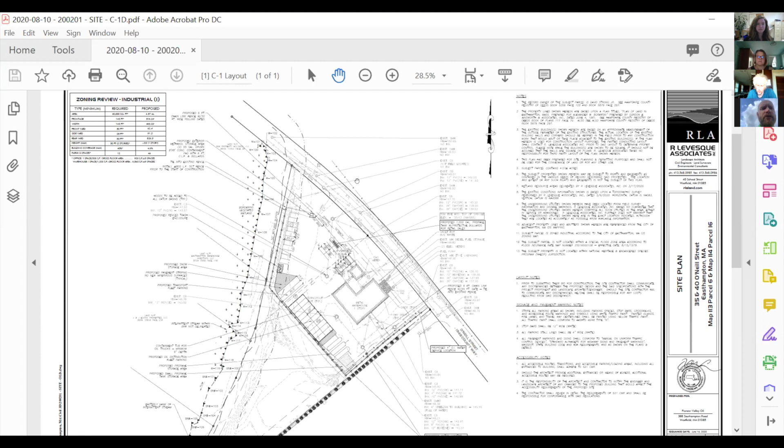The real change is that we relocated the oil truck storage area and the propane truck storage area. We left the propane tanks as is. Today at the site visit we discussed moving them to the top left, but we decided against that to keep the propane tanks in the safest location possible.

But we did have the ability to take the oil trucks. There's no transfer of oil on site, but we do have oil trucks, so the idea was to take the oil trucks and get them out of the buffer zone. The parking you see within the buffer zone, to the top left, those spaces are for the propane storage trucks. There's propane going out to different locations throughout Western Massachusetts from this facility, and that's where they would be stored.

If we can go to the letter—or are there any questions on the plan? There's really no major updates other than those.

Can everybody hear me okay? Questions on the plan?

All right, I think you can move on to the letter. Okay, thank you, and I apologize if it's a little crazy today because I'm literally stopped on the side of the road coming back from my site visit on this job. So it's a little crazy.

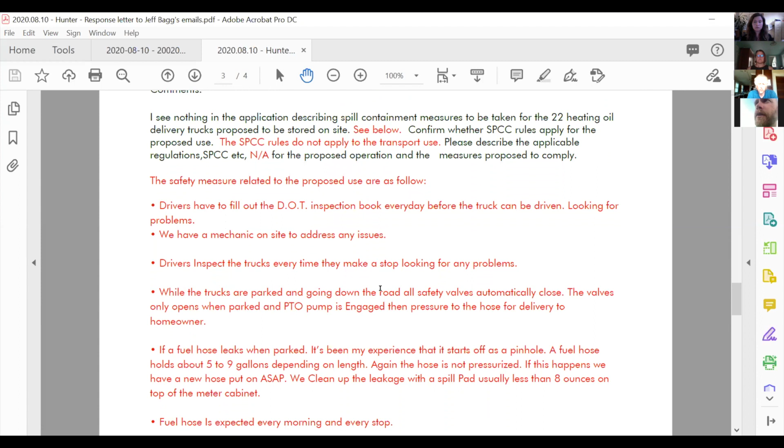So there were questions from Jeff Bagg, similar or related to the same. I've copied and pasted the response from Mr. Hunter regarding the inspections. I believe Mr. Hunter is on the call if he was able to log in and can speak to the details of MassDOT and their stringent requirements for maintaining vehicles and the ongoing maintenance and inspections. So with that, I would turn it back to the commission for any questions.

Commissioner Buttrick, do you feel that your comments have been addressed? Yeah, I think it clears things up quite a bit.

I guess maybe I misunderstood the intent of the site at the last meeting, that there's no transfer of fuel makes things a lot less needful of some of these issues that I was concerned about. I guess I still don't understand the site drainage currently. Not that maybe that's necessarily something we have to worry about, but where does stormwater go currently?

So it's picked up in a series of catch basins on site. I believe they're in line. Could probably pull the plan up again, and then they eventually do go out to the O'Neill Street right of way. Okay. And so that containment area will have some sort of subsurface drain that will connect to that existing drainage system.

And we were thinking a surface plug that would then sheet flow. So the catch basins that exist on site, we would make sure they were hooded and that the sumps were maintained so that floatables could be caught if for some reason there was an issue.

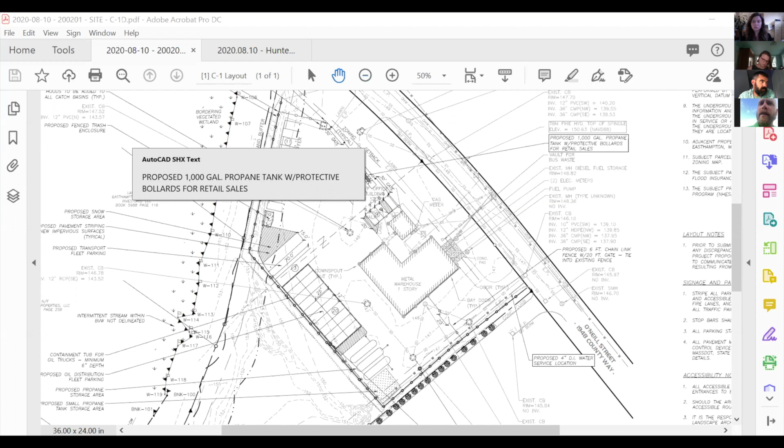In a lot of the discussions we've had with Mr. Hunter, it's become very clear to us that there's not a lot of opportunity for catastrophic failure of oil, just given the way that things work and all of the inspections that are required by DOT.

The one item that he has experienced over the years and is well aware of, something they need to maintain on a regular basis, are the hoses. You can get pinhole size holes in the hoses, very minor. Those hoses are not pressurized, but they can leak a little bit if there's any sort of holes in them. So those are replaced on a regular basis and they're inspected daily as part of their requirements.

There's a log that they do each day. One of the items they look at specifically each day is the hose, to make sure there's no issues. In the event that there has been in the past, I believe he said - Jeff, if you're on, you might want to speak to this a bit better - but very minimal amount of oil is stored in the hose, and since they're not pressurized, you're not getting a spurt of oil. It's really just a slight bit of leakage on the outside of the hose, and they have spill containment in each truck and a spill plan, all required by DOT.

Jeff, are you there? Yeah, I'm here. You did a great job. Can you hear me? Yep.

Do you want to just reiterate, or is there anything I missed?

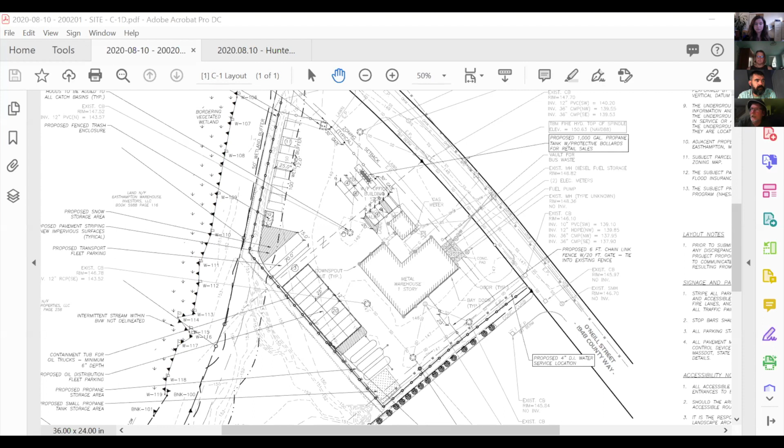Oh yes, Michael. I didn't think David Strong was in the application, so that was a question from our last meeting. For this discussion, he's a neighbor of mine and I'm friendly with him, so I'd like to recuse myself from this discussion. Certainly. Thank you, thank you.

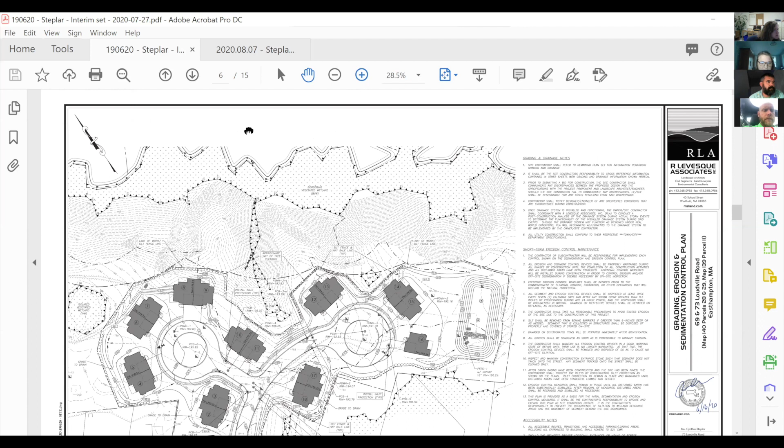Are you looking in this area? Through the chair, are you looking more near these units here so I can zoom in a little bit more? So I'm looking where the road goes between, and I would like to see the footprints of units 10, 11, 17, and 18, if you zoom in that general area.

Okay, so I guess, thank you. So in particular, wondering relative to units 17 and 18, the backs of those units are within the 100-foot buffer zone. Is there any opportunity to rotate so that they're even less in the buffer zone? Does that make sense, what I'm trying to describe? Or what dictates the alignment of units 17 and 18?

So you're talking about a clockwise rotation of 17 and 18? Right, to bring the corner closer to the road. We wouldn't want to go any closer to the property line with 17. And if you look at the back corner of 17, there's a porch there, right where the hand is. If you were to rotate it towards the roadway, you'd have less driveway to accommodate Unit 17's access. So it ends up being a little goofy in the end. To make the swale work, we'd probably still have similar disturbance.

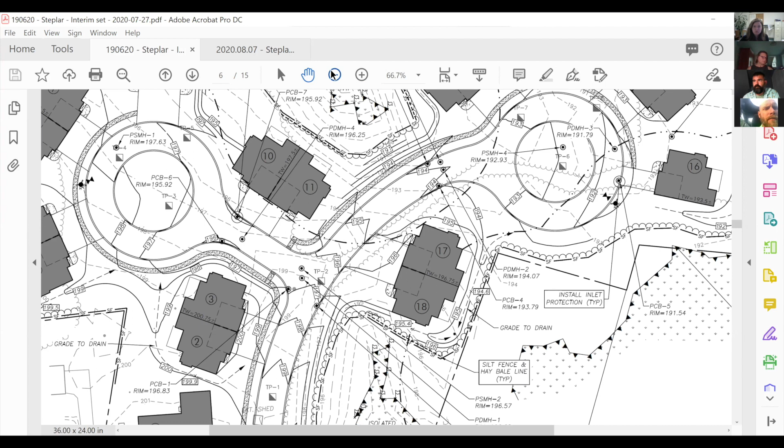We tried to keep it compact. Believe it or not, we kind of tried to keep it compact. And on either end of the community, you'll notice we didn't extend it. Can you zoom out for a second? Yeah, so it's pretty spacious as you get down towards the right-hand side, and then off to the left, the property does go pretty far. So there's wooded area, really, we tried to keep as many wooded areas as possible.

The proximity of the units is really based on the separation required, and then trying to avoid the isolated wetland and the BVW. It kind of nestles, believe it or not, when you're out there. I don't know if you guys got a chance to walk the site, but as you're walking out that road to the right, the units are kind of nestled right in. It sits quite nice, to be honest with you. I think it's going to be a nice little community.

There is some grading, but if you look at 10 and 11, we don't even have enough grading to make it a walkout. It's really just probably an English basement there, if anything. There's some grading behind 8 and 9, but we're still on the reasonable portion of the slope, but really on the upper portion with reasonable slopes. Same thing with 12 and 13, we kind of nestled on that high point where it's a little plateau there. And then 14, 15, and 16 are really flat, out in that meadow.

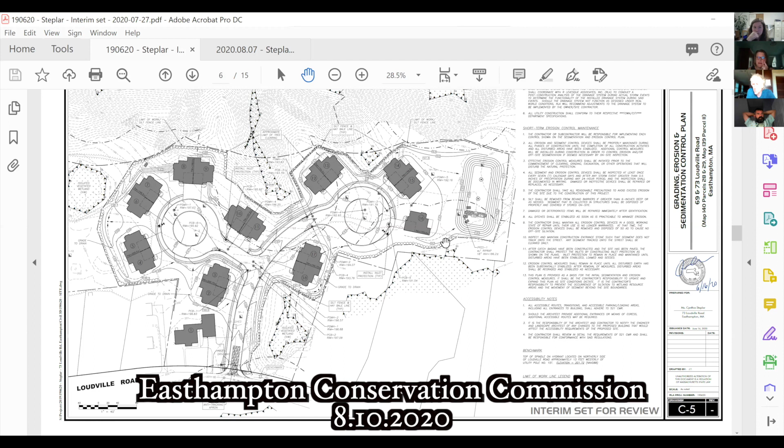This commission, within its purview, could only require monumentation of riverfront and/or buffer zone. But Rob raises a good point, that there are undeveloped areas beyond the limits of work within the parcel, which would require coordination with the planning board. Yep, we're happy to do that. We feel that in the end that's going to be a feather in the cap of this community, keeping that area pristine and maintaining a buffer for the neighbors and the community itself.

One concern that comes to mind, because of other developments, not just in Easthampton, and perhaps it would be different with a condo association versus a subdivision, is management of yard waste and prohibition of dumping outside the limits of work in the riverfront area or buffer zone, or isolated wetlands, though that's not this commission's jurisdiction. What provisions are in place for future management of landscaping activities?

So there will be no on-site landscape equipment. This will all be an off-site landscape contractor, maintenance contractor, property manager. There will be no storage of equipment. They'll come onto the site, do the plowing, do the mowing, and per the contracts, as is typical, they never leave the yard waste because it smells — grass clippings can become a very negative smell. So they take it off site and dispose of it legally and properly with the landscape company. But to the extent that a suggestion or even a condition is applicable, if you guys can incorporate it and feel comfortable with that, we don't have any problem.

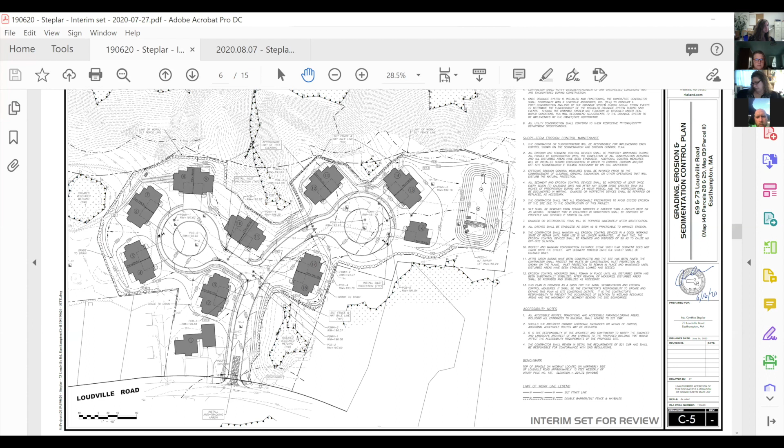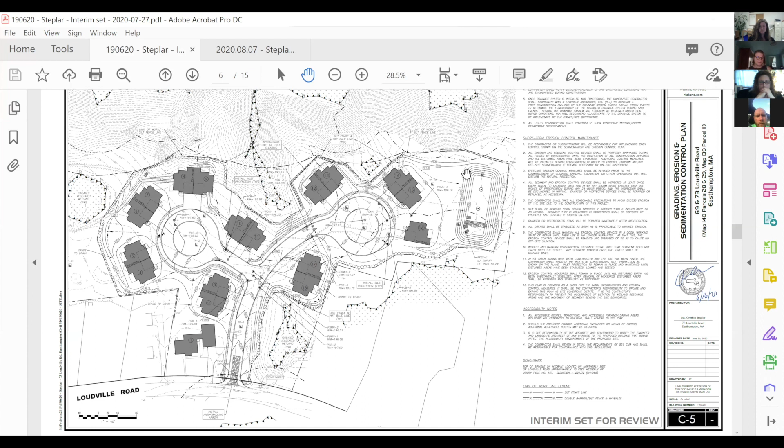If you look at the grading next to the basin, so kind of like top left of the basin, you'll see that there's like this arrow, and then if you follow the arrow, there's a 91.5 to the left, Sophia. Could you zoom into that area, please? Whoa. Okay, sorry, I'm just getting my bearings again. My screen keeps moving. So if you look at—keeps moving again—91.5 there is kind of a high point.

So what's happening is we have water that—so the top of the basin is 91, then there's a 91.5. So if the water does rise up, you have all that additional storage up to the 91.5 spot grade, and then it would sheet flow to the left around the corner of Unit 14 over into that depression area for the isolated wetland, and eventually through the vegetated area, which is all going to remain around the isolated wetland, and then over to the slope.

So the travel path is certainly well over 50 feet from the slope. It's probably close to 130 or 140 feet from where it would—if you see where the label for silt fence and hay bale line is, upper left, right there—right in that area is kind of where we would expect the water to then cascade down the slope if and when it were ever to get there.

So we're not talking about a basin failure that goes over the edge of the slope. We're talking about, if the basin does hold more water, we have a foot of freeboard, and then another, call it another 6 inches of freeboard before it slowly sheet flows to another low area and then down the slope, which is completely vegetated.

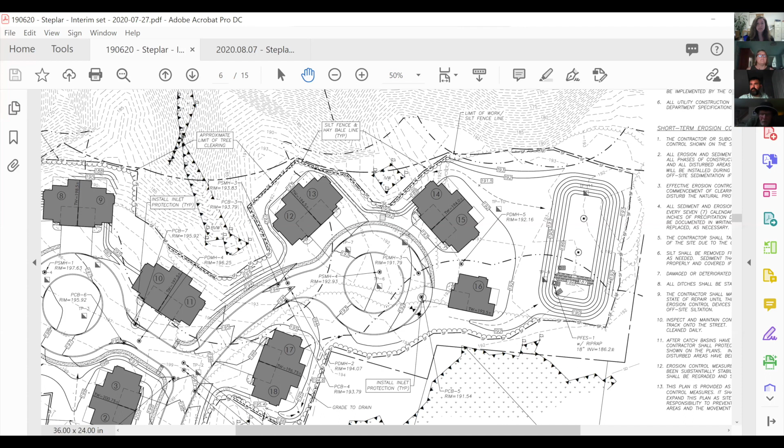So I'm trying to pull up — Cassie, could you share DEP's comments on the screen? Yeah, I can do that for sure. I just didn't know — I know Rob had indicated he wanted to say something in response to Dan's last comment, so while I'm doing that he can make a comment. Yeah, I wanted to make sure the chair was okay with that.

Yeah, so one of the things that does come to mind as I hear Dan's concerns, just looking at it graphically, the basin is rectangular in shape. There's no reason why it couldn't be reshaped in my mind. I do believe we have enough test pits to do so. We could probably pull it back if we can just, I don't know.

I'm sorry, am I the only one who lost Rob there? Rob, you're muted again. Oh, can you hear me? No. Yes. I'm sorry. Yeah, so I don't know if you heard what I said.

So the thought was that the basin could potentially be reshaped and shifted away from the slope fairly significantly, I would expect. It does not have to be a rectangular shape. We have a lot of flexibility because of the nature of that meadow — it's fairly flat. So I think we could look at pulling the basin back. Now that said, at some point there would be — it might not be the 6.5-inch rainfall event in 24 hours, but there's some event, I'm sure, someday that causes an overflow.

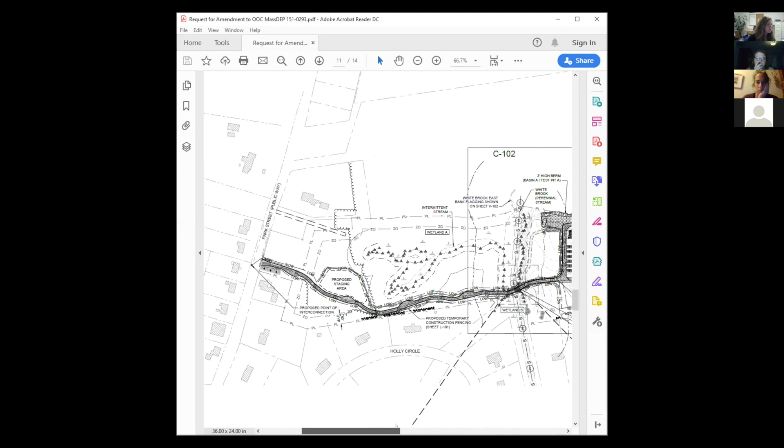The drawing sheet shows, if you recall this project, it's a solar project off of Park Street, and there's an access road that crosses White Brook, and also crosses the BVW. The solar project is essentially complete construction-wise. The only thing remaining is the construction of the 2 wetland replication areas. Those 2 crossings, one of White Brook and one of the BVW farther to the east, produced wetland impacts, and we proposed wetland replication to compensate for those.

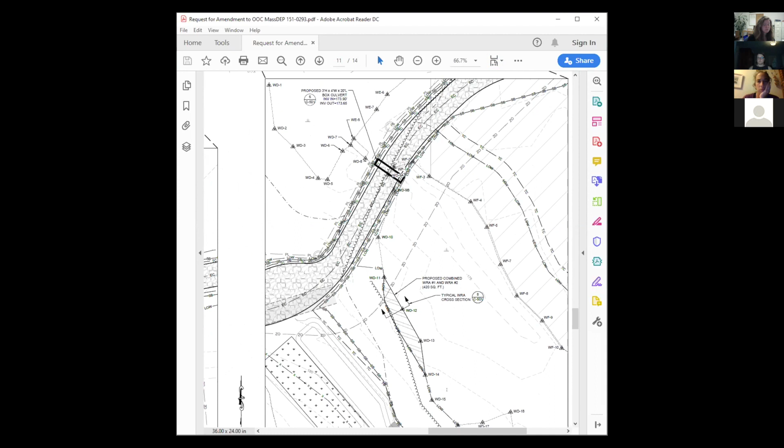This request for amendment we're presenting for 2 reasons: both impact areas were significantly smaller than initially proposed. The one at White Brook was reduced because the contractor was able to place the road at a lower elevation over the new replacement culvert, so there was no significant side slope incursion into the BVW adjacent to White Brook. If you're looking at C101, the inset in the center of the sheet, the left one, that small rectangle is the new culvert. There we had proposed up to 846 square feet of BVW impact, but the total impact was only 89 square feet.

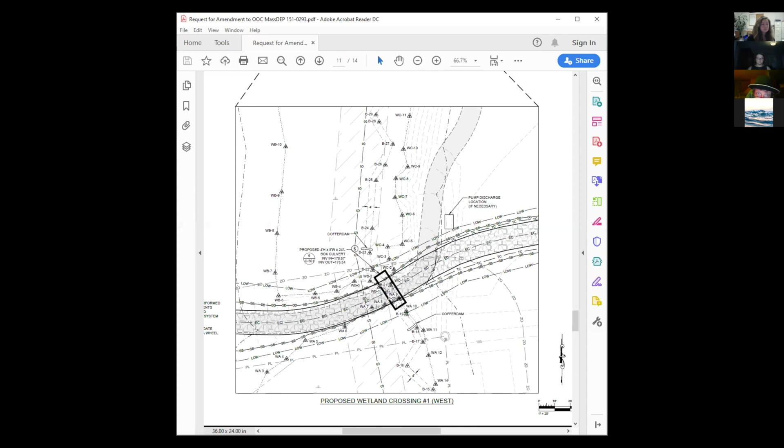At the other crossing, shown in the right inset, the road was realigned to hug the northern property boundary and cross at a narrower part of the BVW. Our original impact was proposed at 1,276 square feet. The actual impact there was 191 square feet.

So that's the first of two parts of our request for amendment: one, to reduce the area of the wetland replication areas we will construct, and two, what we discussed in June, to relocate the wetland replication area in the left inset adjacent to White Brook, placing it together with the second replication area, constructing one replication area instead of two.

Our rationale for that request was that we didn't have adequate topography far north of the access road, and it turns out the topography is rather steep to the west side of the BVW, which would pose constructability issues and a threat of slope instability that could cause erosion into the BVW and White Brook.

So again, two parts of the request. One, we'd like to relocate that small 89 square foot impact compensation replication area to combine it with the one on the east. Two, we'd like to reduce the total area of wetland replication to correspond with the area of actual impact. In the letter, I stated the total impact is 280 square feet, and we are proposing a wetland replication area of 420, which is 1.5 times the area of actual impact.

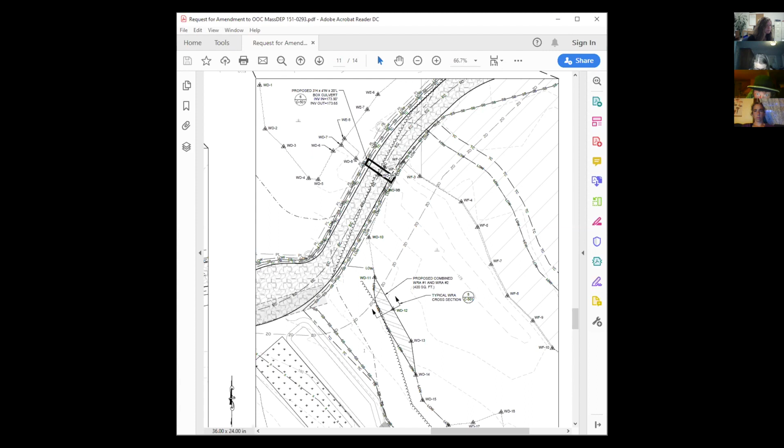Okay, the proposed combined area, sure. Cassie, there is a photo attachment with 3 photographs, and the third of those, on the 9th page of the PDF, is a view from the access road of that proposed combined replication area. Right now it's a meadow. It grades gradually into the BVW. It's relatively flat, a pretty gentle grade.

So it's a moist meadow, but it grades to the wetland there. We don't think it'll be too difficult to reduce the elevation there a little bit to obtain hydrology, seed it with a wetland seed mix, and plant some woody wetland shrubs.

Cassie, can you go to where the proposed plant community is described? And you said this area is roughly 420 square feet? Yes, correct.

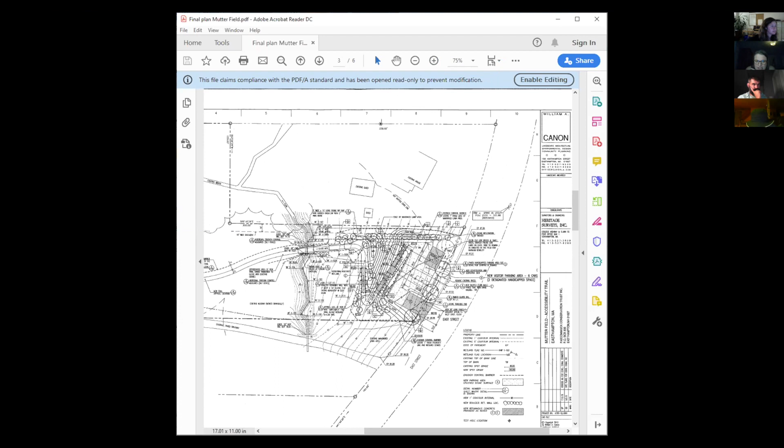This isn't the as-built, but it matches pretty well to the as-built. This is the area that was paved. This is the buffer zone - can you zoom in more, please? I'm having a hard time. Okay, so there's the 100-foot buffer zone line.

So technically paving that parking lot, converting pervious to impervious, is subject to the Wetlands Protection Act and should have undergone review before it was done. So I think we need to reach back out and explain that to Mr. Klein. Okay, I can do that. Does anyone else have anything to add?

Okay. And are we thinking that as a result he might ask what next steps would be - would it be after-the-fact permitting, or? I would prefer that to an enforcement order. And would it be an RDA or would it be an NOI? I think I need to give that some more thought unless anyone else has input.

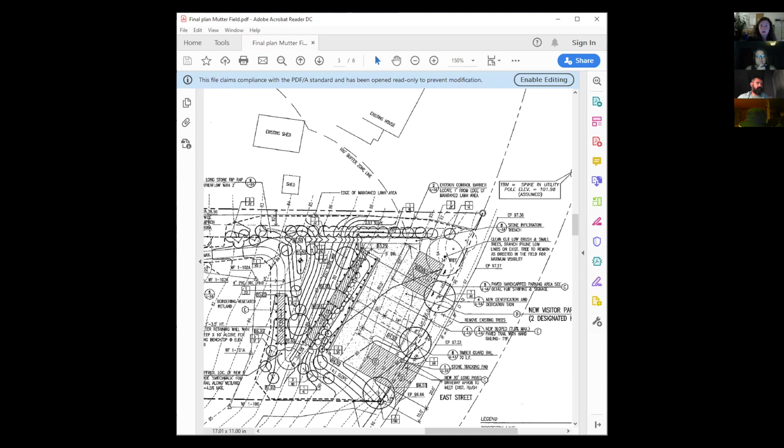Okay, next item, 66 Cherry Street. Do you send a photo? Yes, we do. So, stop sharing that.

I received a comment from a member of the public that they believed there had been some depositing of soil within the resource areas associated with the Brickyard Brook area. Upon visiting that area, it does appear that that's the case to me. I'm going to share this image that I have now.

And I was there this morning, they're still actively working on it. It looks like there's also a layer of sawdust too. I don't know exactly what project they're doing - they were crushing gravel, it looked like, but...

Okay, so this is a clear violation. Cassie, can you please issue a cease and desist? Yeah, no problem. Order with cease and desist. Oh yeah, that was my question - did you want me to just go straight to an enforcement order, or do the cease and desist first and request attendance? Go do the cease and desist first, but...